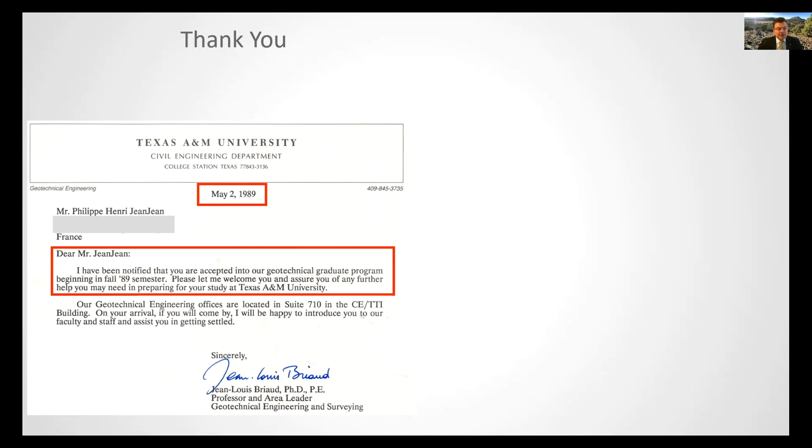I would be remiss, of course, if I didn't say thank you to Dr. Briaud. This is the letter I received in France back in 1989 from Dr. Briaud, welcoming me to Texas A&M University and assuring me of any further help that I may need in preparing for my studies at Texas A&M University.

And this is the note I found on my desk in 1992 from Dr. Briaud again: Dear Philippe, Amoco has an opening in the Research Geotech Division. If you wish to apply, send a letter with your bio data. Looks like a great job. It was a good job. It was a great job. I applied and I got the job, and Amoco merged with BP in 1999, and this is still the job I have today. So thank you, Dr. Briaud, for welcoming me to Texas A&M and helping me find a job all those years ago.

Now, let's talk about the world energy transition. I think it's a tremendously exciting time to be in the energy business. I'd like to show you this graph here.

This shows the share of world energy by fuel type. Oil reached 1% market share in 1877, and it took more than 40 years for oil to reach 10% market share. Gas reached 1% market share in 1899, and 50 years later gas still had not reached 10% market share. Nuclear energy never quite got to a 10% market share. Renewable energy reached 1% market share in 2006.

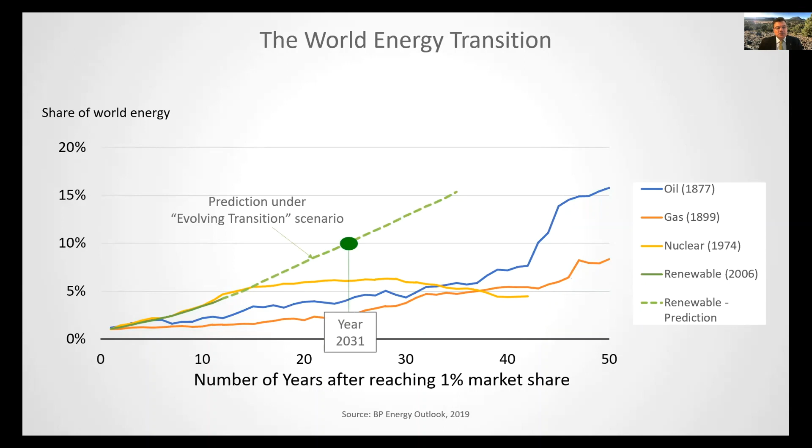What's fascinating is the predictions as to the growth of renewable energy. It is predicted to reach 10% market share in 2031, just 25 years after reaching 1% market share. So the conclusion is that renewables, which include wind, solar, geothermal, biomass, and biofuels, are set to penetrate the global energy system more quickly than any fuel in history. I found that fact absolutely fascinating.

The portion of renewable energy of interest to us today is offshore wind energy. We'll first look at the structures used to develop both oil and gas projects and offshore wind projects. The simplest structures are the monopod and multipod structures. In oil and gas, this is a monopile, which we call a freestanding caisson, and this is a multipod structure. They represent only a few percent of all platforms, and we use them in water depths that are very shallow, say less than 50 meters.

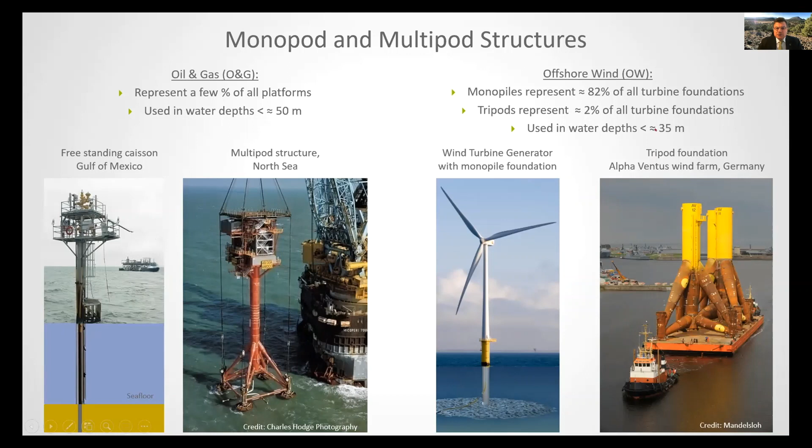In the offshore wind energy sector, monopiles are extensively used. They represent about 82% of all turbine foundations because they are very easy to fabricate, and the industry has become very efficient at procuring and installing them. Tripods are also used a little bit, but those structures are used in very shallow water depth, less than 35 meters. When the water gets a little deeper, we use jacket structures.

In the oil and gas sector, jackets are just steel tubular structures, as you see here. They represent 95% of all platforms. They are used in water depths up to 411 meters, and most of the time they are founded on the seafloor with open-ended steel tubular piles.

In the offshore wind sector, jackets are also used. They represent about 10% of all platforms, and so far they've been used in water depths up to 60 meters, mostly founded on driven piles. So these are the main types of structure.

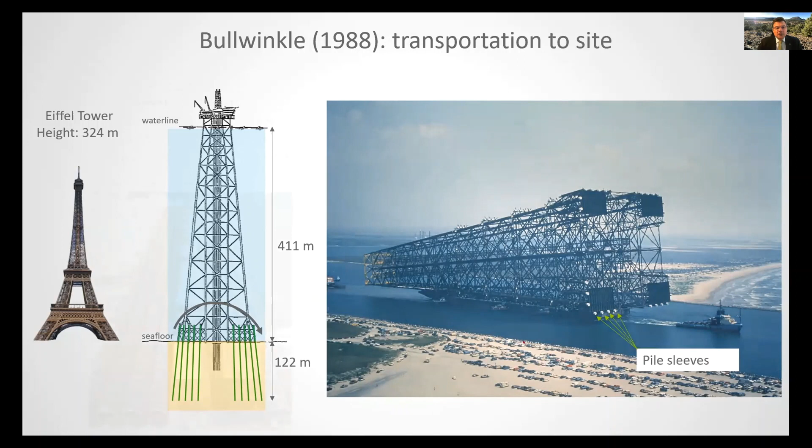What's fascinating is that things can get very big in the offshore industry. You can see the world record jacket, the Bullwinkle jacket, 411 meters in height, being towed to the site here. You can see the cars in the parking lot to give a scale of truly how gigantic the structure is. Those big structures can be anchored with big piles.

Here are typical dimensions. In the oil and gas business, we have diameters up to 2.5 meters, lengths up to 140 meters. So the L over D ratio, the aspect ratio, is typically greater than 30. Those piles can be long and are called long and flexible. You can see an example here on the barge—this is about a 140 meter long pile, about 1.5 football fields, and for scale you can see the people standing on the barge. The capacities are also very large, up to 100 meganewtons.

In the offshore wind industry, the diameters are much bigger because we need the monopiles to be stiff and to have the right natural period, and the best way to do that is to have a very large diameter. The vertical loads are not very high, so the embedment length is less, up to 40 meters. So the aspect ratio, the L over D, is between 2 and 6, and those piles are short and rigid. We'll explore in a little while the difference between long and flexible piles and short and rigid piles.

One of the consequences of these large sizes is that we cannot perform full-size pile load tests. We cannot find sites and machines that can apply those loads onshore. So this is not an option for the offshore industry.

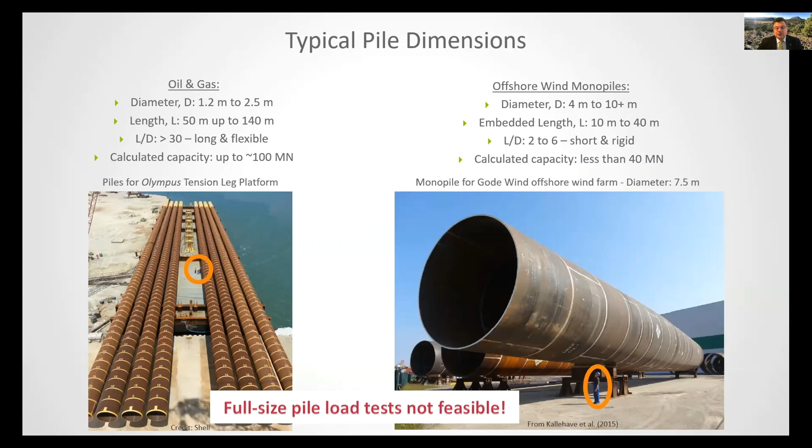The first topic I'd like to talk about today is the design of axially loaded piles in silica sand. Most offshore piles have been designed with the American Petroleum Institute, the API method, used since 1969. Very simply, the method says that the unit friction along the pile is given by the coefficient of lateral pressure times the vertical effective stress times the tangent of the interface friction angle, and that has to be less than a limiting value.

Similarly, the unit end bearing Q is given by a bearing capacity factor times the vertical effective stress at the tip of the pile, and that has to be less than the limiting value. All those parameters that you need are given in the codes and standards as a function of sand relative density. Very simple equations.

So a lot of authors over the years have investigated how well the method is doing. To do that, you take a database, and you can see various databases here used by various investigators. The graph shows on the y-axis the ratio of measured capacity over calculated capacity with the API method. If the ratio is less than 1, the capacity is overestimated. If it's greater than 1, the capacity is underestimated. This ratio is given as a function of the sand relative density, for piles in tension and for piles in compression.

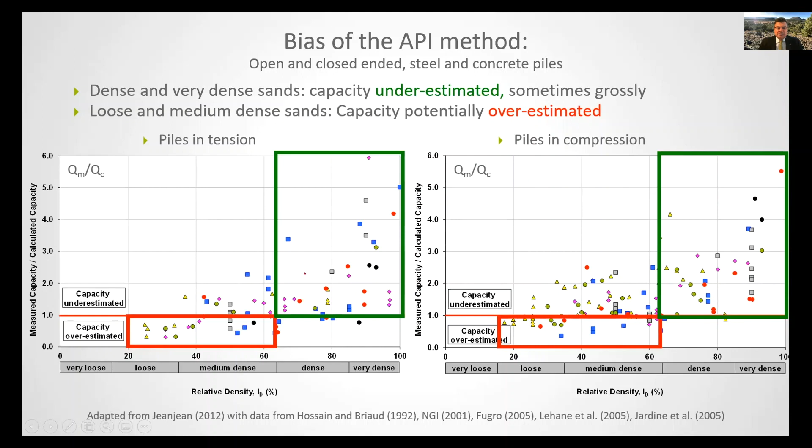So what do you see when you look at those graphs? Well, you see that for dense and very dense sand, the capacity is underestimated, sometimes grossly. For this particular data point here, the capacity is underestimated by a factor of 5. What you also see is that for loose and medium dense sands, the capacity is potentially overestimated. But generally speaking, you look at this graph and you tell yourself, it's not looking particularly impressive in terms of ability to predict capacity.

So here are a few thoughts on the API method. Why have we been using it for so long? Well, it does provide a reliable, sometimes overly conservative, capacity estimate for open-ended tubular steel piles loaded in compression in medium dense to very dense sand. And that's the typical offshore design case. So typically offshore, we are in this little box here for dense, very dense, and medium dense sands.

However, the method does not capture the physics of how friction and end bearing develop. It's very difficult to justify why the friction and the end bearing are proportional to the effective stress, which varies linearly with depth almost. It's difficult also to defend the existence of a limiting value both for the friction and the end bearing. Therefore, because the method does not capture the physics, it is difficult to extrapolate the method outside the database of pile load tests to design very large diameter piles.

The industry also decided in the 90s that it needed increased efficiencies. In other words, the conservatism in the method was too high, and we needed a more efficient method. Which brings me to CPT design method.

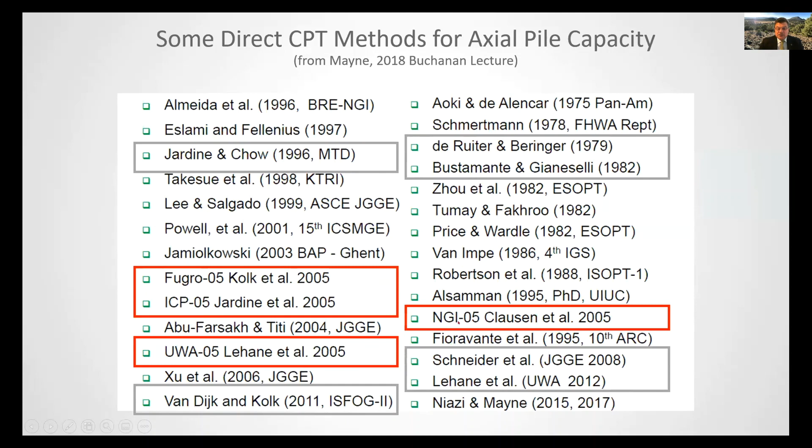Those 4 methods were developed between 1995 and 2005, but the key point is that each method was developed from a different database. In 2005, there really was no consensus in the industry as to which method was the best. And there was a bit of a hiatus between 2005 and 2014 where basically the industry agreed to disagree on which method to use.

Then there was a joint industry project, a JIP, initiated in 2014 to develop a unified, non-associated CPT-based design method for piles in sand. Non-associated, meaning that the method does not have the name of a contractor or a particular university. It's just known as the unified CPT method.

So the first step was to develop a unified database of pile load tests. Many people thought that could never be done, that the industry could never agree on a set of unified database. But that took 3 years. At the end of 3 years, we ended up with 71 tests on open-ended and closed-ended piles, from which we could develop the unified method.

So just to give you an example, these are the compression tests on open-ended steel tubular piles that have been used over time. You can see the tests that were used to develop the ICP method, the tests used to develop the NGI method, the tests used to develop the Fugro method, and the tests used to develop the UWA method.

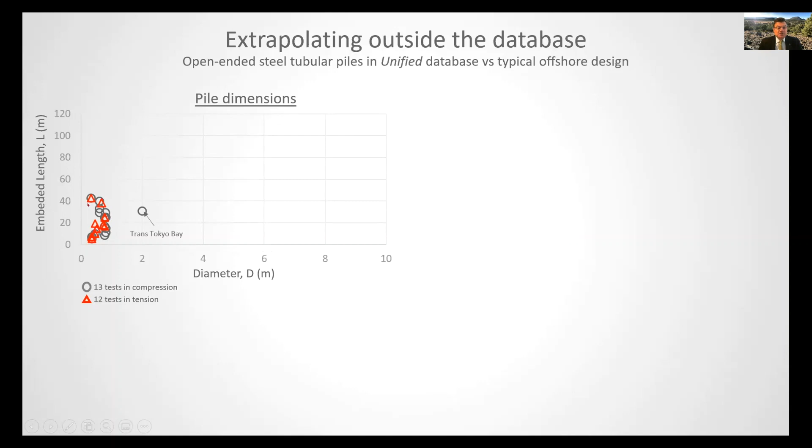Now those dimensions have nothing to do with typical dimensions for an offshore wind monopile, an oil and gas jacket pile, or an offshore wind jacket pile, except for one test. There's only one test, the Trans-Tokyo Bay test, that has reasonable dimensions.

Now when you look at the capacity in the database, whether in compression or in tension, you can see that most of the tests in the database have a measured capacity of less than 5 meganewtons. Whereas in practice, we typically have to design those piles for ultimate capacities between 30 and 100 meganewtons. And again, there is only the Trans-Tokyo Bay test that fits a reasonable real case.

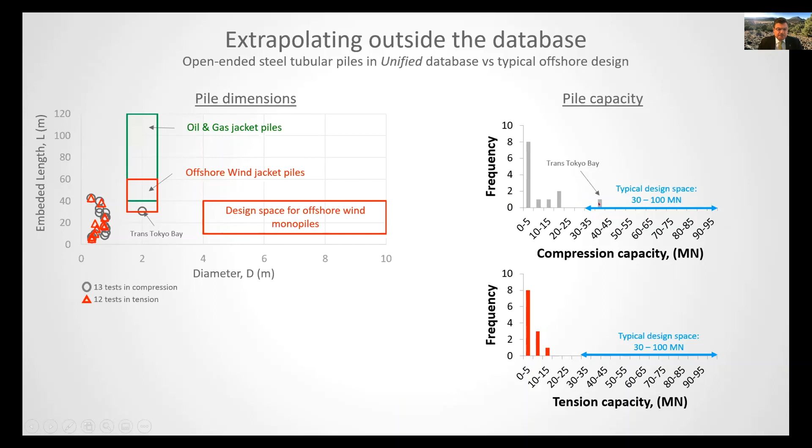So those are the key challenges. After decades of testing piles in sands, we only have one test that resembles an offshore design condition. Therefore, the unified method needs to capture the physical processes that control friction and end bearing, and needs to understand how those processes extrapolate from the database to the pile design condition.

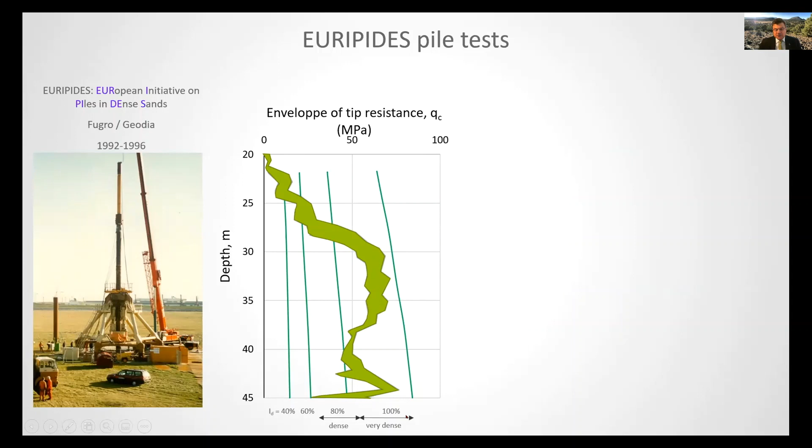So to give you an example of the improvement with those CPT methods, let's look at some results from the EURIPIDES pile load test, which were performed in the 90s. So you can see within the depth of interest, the tip resistance envelope, we are dealing with dense and very dense sands. And here is an example of test results.

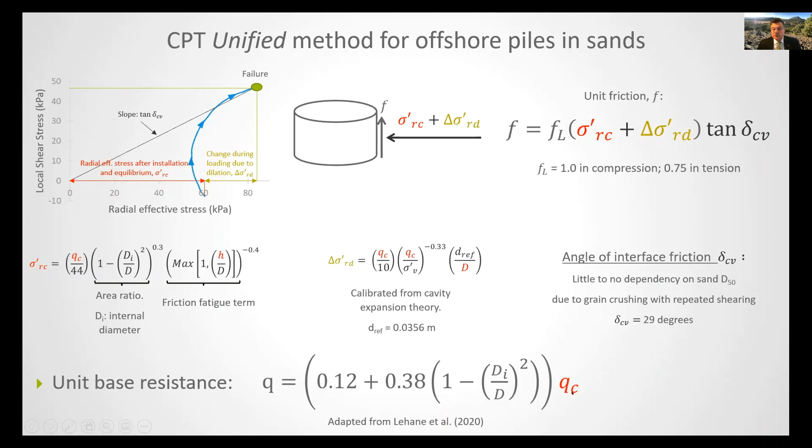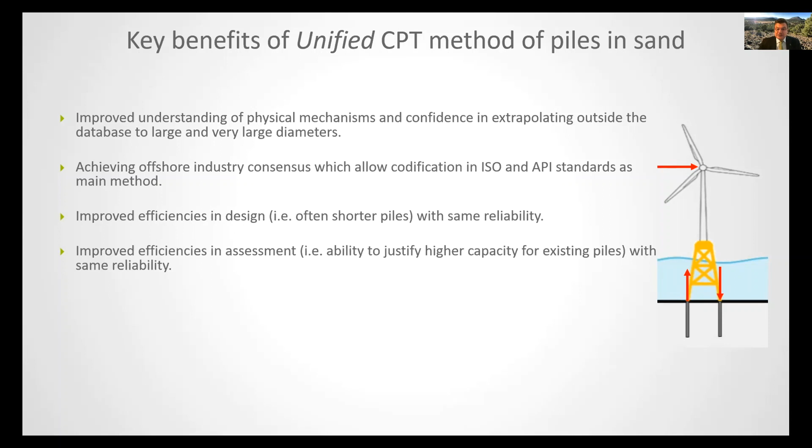We've improved efficiencies in design. That is, for a given load, we have a shorter pile with the same reliability. We've improved efficiencies in assessment. That is, for an existing pile, we're able to justify a higher capacity with the same reliability. We've removed some of the unconservatism of the API method for piles in loose and medium dense sands. And finally, this method is equally applicable whether it's an oil and gas or an offshore wind structure.

This is an example here of an oil and gas, of an offshore wind jacket. So what's fascinating is if you look at the timeline of the development and codification of the offshore CPT method, between the time we did those key instrumented pile load tests in the 90s to the time we will publish a codified method in 2022, it is a 30-year journey.

You see, it's easy, or it's one thing to say the API method does not work very well and needs to be replaced, but it's quite another to agree on what the replacement method should be. So it's a landmark achievement for us in the offshore industry, which is why I'm really excited to share it with you today.

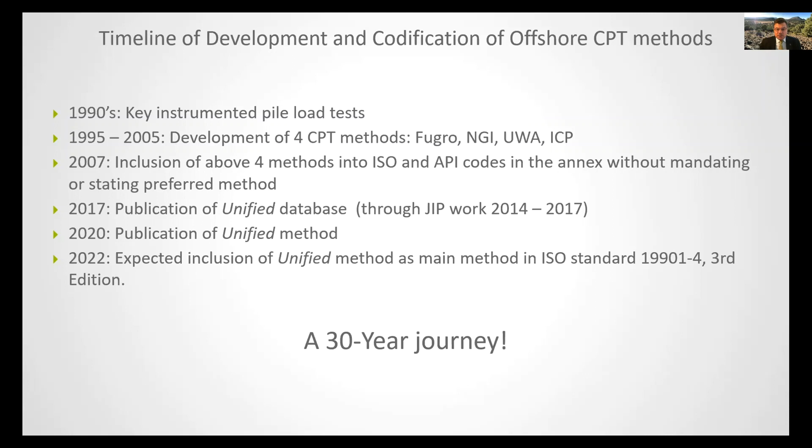Let's switch topics now. The second topic I'd like to address is laterally loaded pile design in clay. Most piles offshore have been designed using beam column analysis and PY curves. In beam column analysis, the pile, which is loaded laterally, is modeled as a beam, and the soil is modeled as a series of nonlinear springs called PY springs, which describe the development of the lateral soil reaction, P, as a function of the lateral pile displacement, Y.

These methods are applicable and appropriate for the analysis of long, flexible piles. The soil is assumed to move only laterally, so to model it, I need to use only lateral springs. The pile tip does not move, so I do not need to model it.

The PY curves in current API and ISO codes were based on limited tests performed in the late 50s and early 60s, published by Professor Matlock in 1970 and included in API practice in 1972. They work well for us, but they've also been widely documented to underpredict both the soil stiffness and soil strength. So why have we been using them for 50 years? Well, that's because they typically overpredict the maximum bending moment in the pile, so most of the time they put us into a safe design condition, although the conservatism can be excessive.

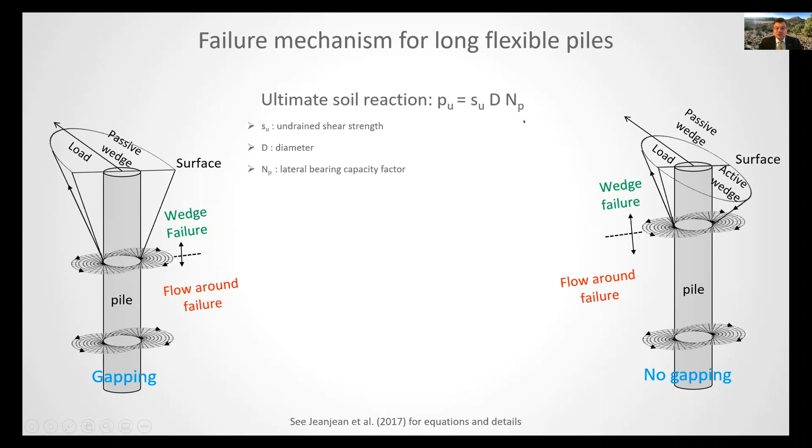So how do we calculate the ultimate soil reaction, PU? Very simple: it's the soil shear strength times the diameter times a bearing capacity factor. So the name of the game is to try to calculate this bearing capacity factor.

The new method for the wedge failure results from finite elements and upper bound limit analysis, and for the flow-around mechanism, it uses results from upper bound limit analysis. The bottom line is the bearing capacity factor you will calculate with the new method is higher than the bearing capacity factor from the existing curve and method developed by Professor Matlock.

So how do we get the shape of the PY curve? We use what's called a direct simple shear test in the laboratory. We perform this test on a clay sample and measure a normalized stress-strain curve. We use this stress-strain curve to define hardening properties in the plasticity soil models. We then run finite element analysis where we push the pile laterally and measure the resistance of the soil.

From this, we obtain numerically a normalized PY curve, the development of P as a function of lateral displacement. What we've developed is a scaling method for which each point on the normalized DSS curve is transformed into an equivalent point on the normalized PY curve. That's how you get the shape of the PY curve.

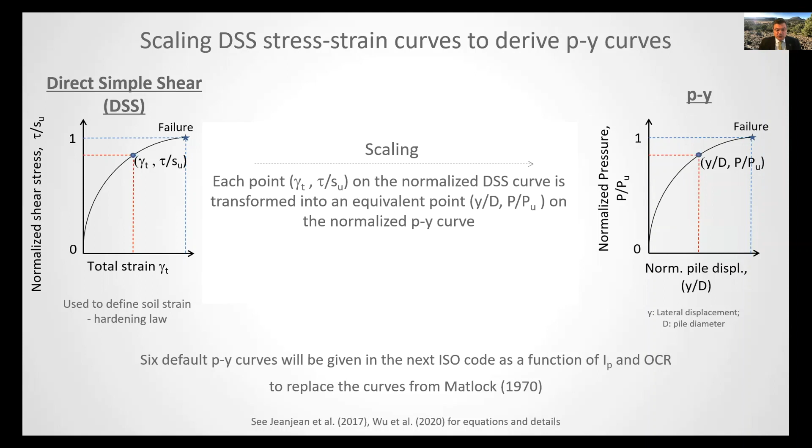Now, in the new ISO code, you will have six default PY curves given as a function of soil plasticity and overconsolidation ratio, and those will replace the curves of Professor Matlock.

So there is no question that the loads the platforms are experiencing are cyclic in nature. So what do we do to understand those? Well, it brings us to understanding the behavior of clay under cyclic loads, and again we use the DSS test to do that.

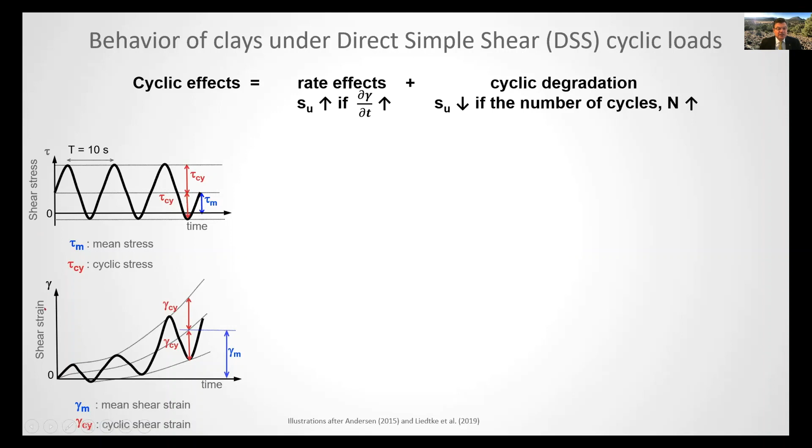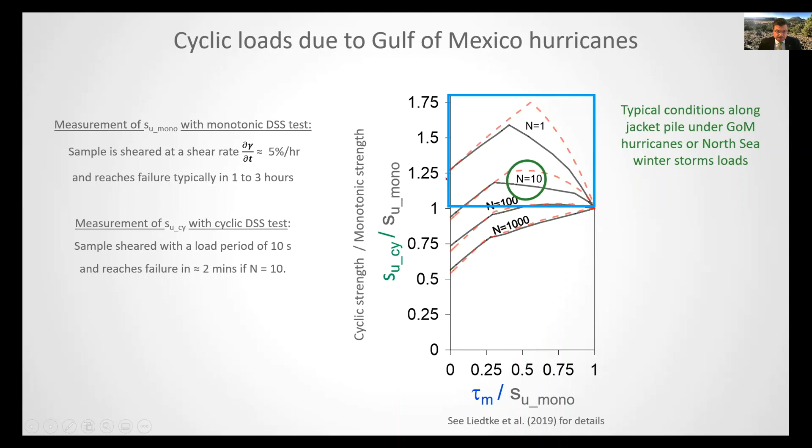Now, this is where we are for a full-size jacket. And this is where Professor Matlock was when he ran his tests in the late 50s, early 60s. He performed cyclic tests, but with hundreds of cycles. We know now that those hundreds of cycles are not representative of what is experienced by a platform offshore. But for hundreds of cycles, this diagram tells you that the cyclic strength is less than the monotonic strength.

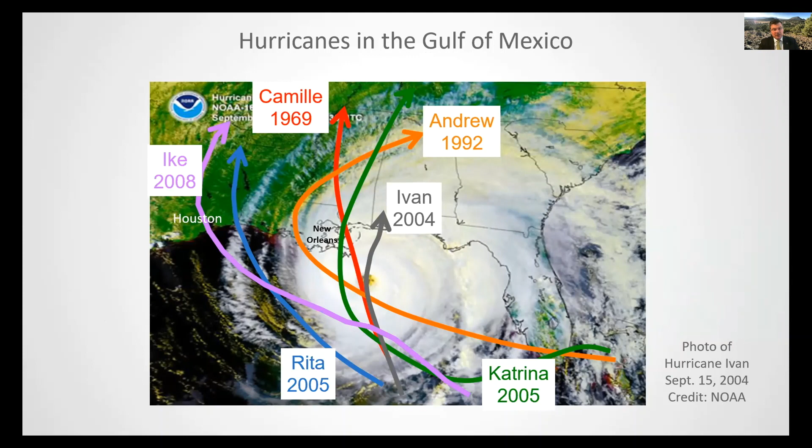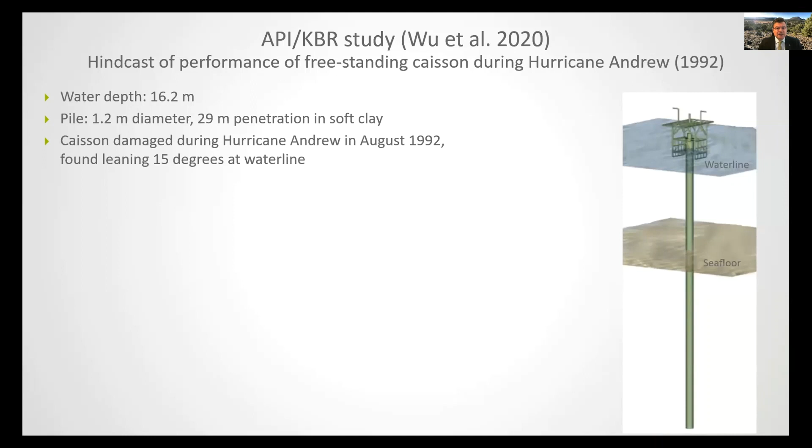It was found leaning 15 degrees at the waterline. This is not the actual caisson, but one similar to it. This is what you would find when you go offshore after the hurricane.

So what we did are what we call dynamic pushover analysis using two sets of PY springs, the current monotonic PY curve and the future cyclic curve. You can see here the waves hitting the platform.

Using the current monotonic PY curve, you can see that the pile is starting to plastically hinge. The pile above it is starting to yield, but close to the seafloor you see no yielding in the pile because the soil's resistance is too small. The PY spring is too soft.

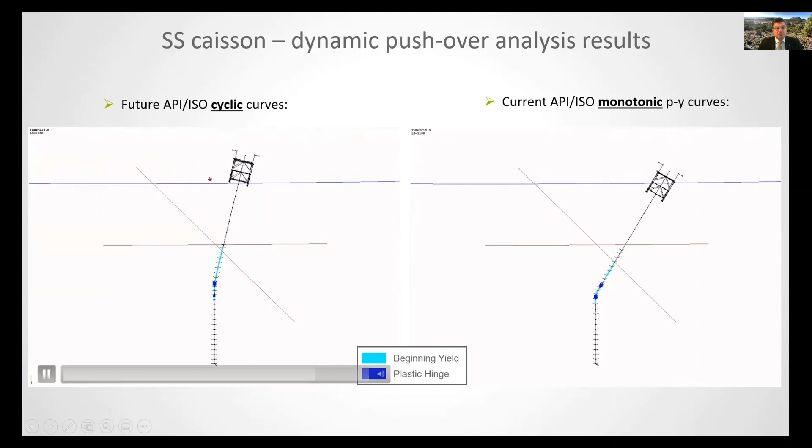With the new curves, you can see that the plastic hinge is also forming a little higher, but now the pile is yielding all the way to the seafloor because the PY springs are stronger. And you can see that the caisson is starting to lean more and more with the old curves than it is with the new curves.

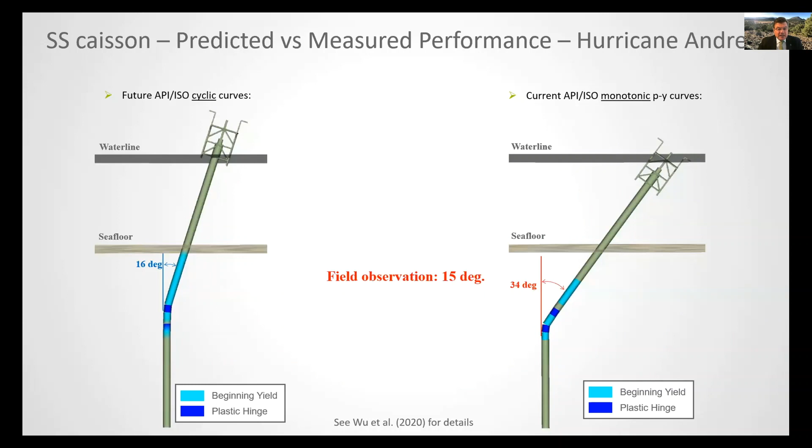So at the end of the analysis, using the current curves, we would predict that caisson to be leaning 34 degrees after the hurricane. With the new curves, the cyclic curves predict it will be leaning 16 degrees. And I've told you already that the field observation was 15 degrees. This is really exciting. For the first time, we are able to hindcast or reproduce the observed damage that we see after hurricanes.

Another example is this jacket, which was damaged by Hurricane Gustav and Ike, but mainly Hurricane Ike in 2008. So what kind of damage was observed on this platform?

Close to the waterline, you had joint failures and separated members. You had cracks at some of the connections. Some of the braces or members were buckled. You can see that this member here is no longer horizontal, it is bowed because it has buckled in compression.

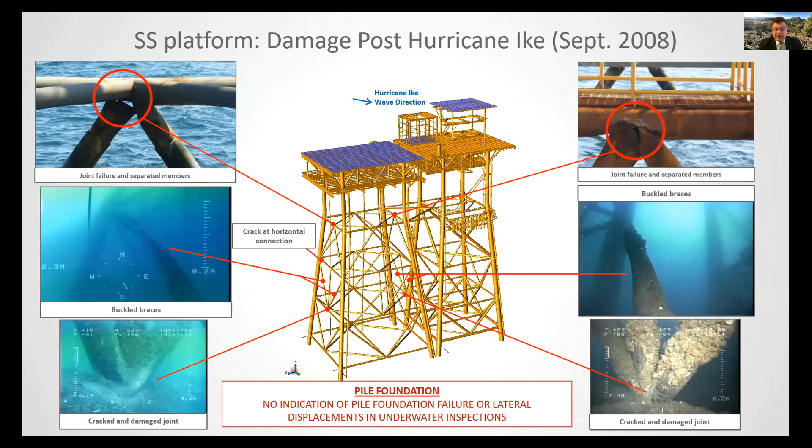Closer to the seafloor, we see cracked and damaged joints right there. And very importantly, we see no indication of pile foundation failure or lateral displacement at the seafloor. We didn't see that in any of the underwater inspection.

So how well did we do predicting the damage with the new springs? We have little damage in the pile, just a little bit of yielding, and that's consistent with the observation. And this buckled member here that was predicted only with the future cyclic PY springs, well, that's this member here. It actually did buckle. So again, we are able to much more accurately reproduce the damage and behavior that we see with those new PY springs.

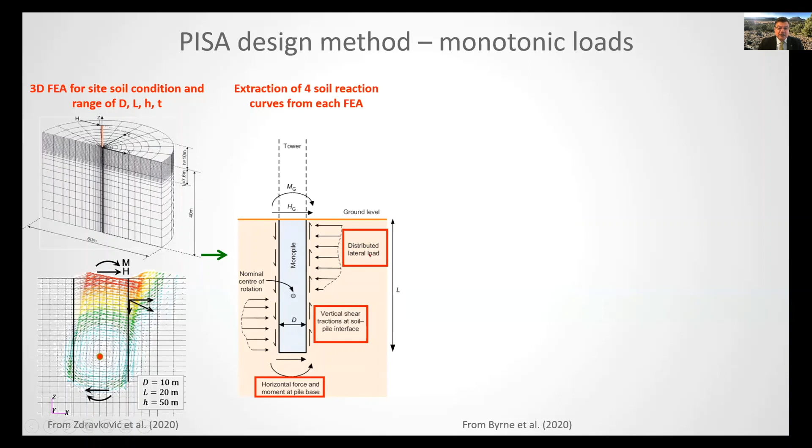If you do that, you will see that the soil along the pile wall not only moves horizontally but also vertically, because the caisson is short and rigid. You will also see that the base moves horizontally and also rotates. So to capture all those soil displacements, from each finite element analysis you extract 4 types of soil reaction curve: one distributed lateral load reaction curve, one vertical reaction curve, and 2 reaction curves, the horizontal force and the moment at the pile base, to capture the behavior of the pile tip.

At the end of the day, you generate a beam column model that has 4 reaction curves. The idea is that in a practical design, instead of having to do thousands of 3D finite element models, now you can do thousands of beam column analyses, which are much more computationally efficient. But now you not only have 1 soil reaction curve, the PY curve, you have 4 reaction curves. However, this distributed lateral load reaction curve serves the exact same purpose as the PY curve we used in the oil and gas industry. It models the lateral soil behavior.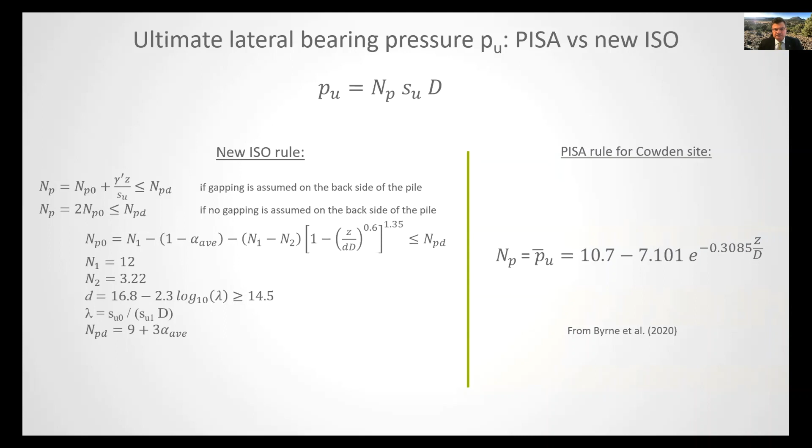Well, if you take the tests at the Cowden site, those 2 tests here, and use the ISO method, you can calculate a lateral bearing capacity, NP, as a function of the normalized depth Z. You have this for those two piles. And this is the empirical relation I just showed you that was published for Cowden, which applies to all pile diameters and lengths. So you can actually see that although they look completely different, they give you very similar results.

The PISA project also did finite element analysis for what they call calibration piles. These are bearing capacity factors extracted from finite element analysis. At some depth, those values are very small, but these are the values around the rotation point of the short and rigid monopiles, so the lateral bearing has not been fully developed. Those data points are neglected.

So again, you can use the ISO method for the FEA soil condition, and you calculate those two profiles for those two calibration piles. You get very good agreement in terms of calculating the ultimate bearing capacity between the PISA framework and the new ISO framework.

In terms of the shape of the PY curves, in the ISO document, these are the three default shapes of the curve presented for plasticity indices greater than 30%: the curve for OCR less than 2, OCR of 4, and OCR 10. And these are the three curves for plasticity indices less than 30%, applicable to the Cowden site, which has a plasticity index of about 20%.

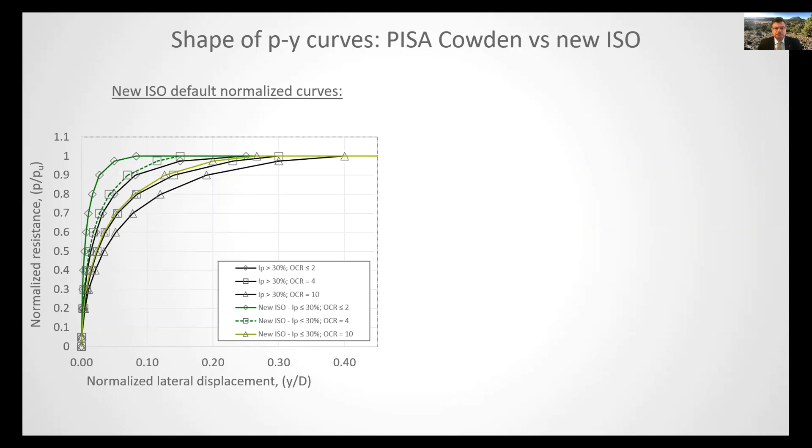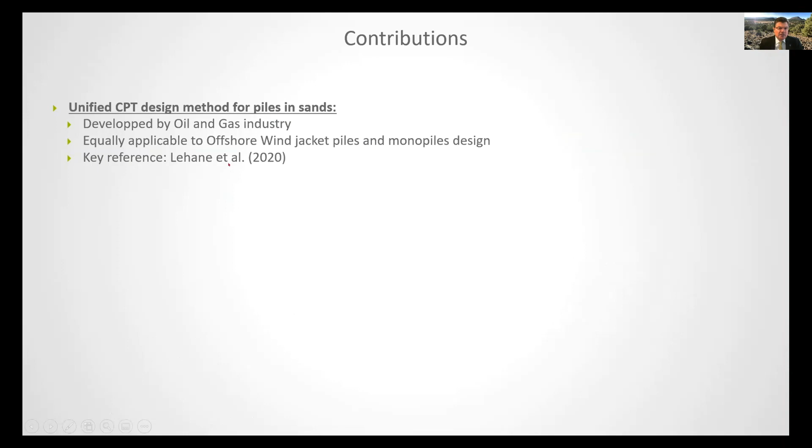I've told you about the new ISO PY curves for long flexible piles in clays, again developed by the oil and gas industry, but also applicable for offshore wind jacket piles, though not for monopiles which have an L over D of less than 10. For those design conditions, you need more soil reaction curves, going from one reaction curve, the PY curve, to four reaction curves, for example, as per the PISA method. Other designers use only three curves, so there's no industry agreement on how many curves are really needed. Again, read the paper if you can wait until May of next year.

This is an offshore technology conference paper that will have all those details. I've also told you about the PISA design method for clays, developed completely independently by the offshore wind industry. It's very satisfactory to see that the distributed lateral load reaction curves for the Cowden site are entirely consistent with the recommendation of the new ISO PY curves. We could use the PISA design method in the oil and gas industry if we have a foundation that has a similar geometry and aspect ratio. And again, this is one reference, a Geotechnique paper that I would encourage you to read if you're interested.

These are all the references I've quoted in the paper, in the lecture. Don't bother writing them down now. You can listen, view the recording of the lecture, and write them down at your leisure later on.

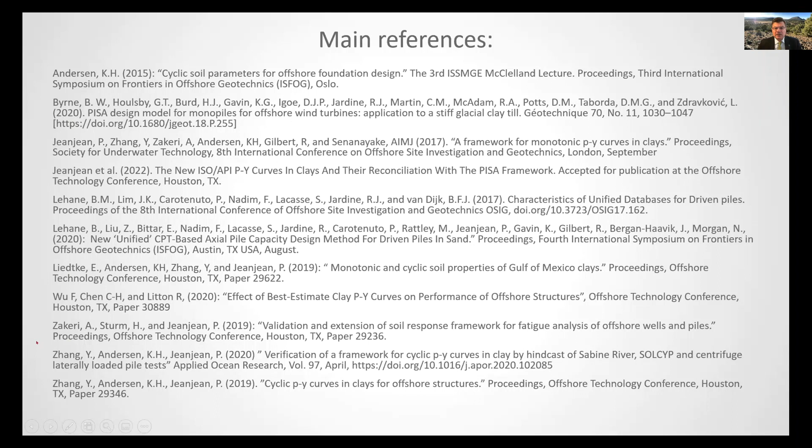So if any of what I said is of interest to you, then I would recommend you check out this website, isfog2020.org. ISFOG stands for International Symposium on Frontiers in Offshore Geotechnics. The conference was supposed to take place face-to-face in August of 2020 in Austin. Obviously, that did not happen because of COVID, but we did publish the proceedings that you can purchase, where you will see 200 plus technical papers, 6 keynotes, and the 4th ISSMGE McClelland Lecture. We really hope to be able to have an in-person conference in Austin next year, in late August.

And to try to advertise the conference, we will be offering 6 webinars in 2022, free of charge, streamed live and uploaded to YouTube. So you can see we'll be offering 1 a month on a variety of topics. You can see the organizers and the presenters here. We'll talk about data science, cyclic loading, the new PY curves for piles in clays, the new CPT-based design method for piles in sands, and then we'll talk about 2 joint industry projects from the offshore wind industry, the Redwind JIP and the PISA JIP.

So all of this is organized by ASCE and the Geo-Institute. So again, check this website. You can get the information to all this, the webinar and how to register for the conference.

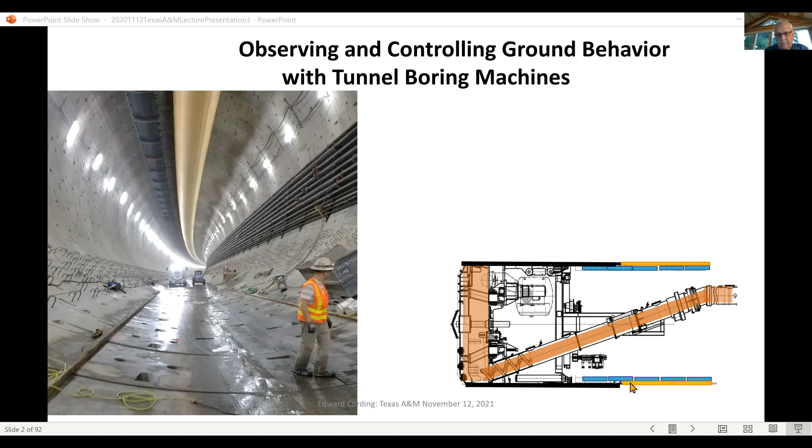And it has continued with the pressurization around the entire shield, where we have what is essentially a fully pressurized envelope. We are pressurizing not just the face, but the perimeter of the shield and the gap that is being grouted in the tail, grouting that under pressure. A fully pressurized envelope, and that is what is helping us essentially eliminate ground loss and reduce settlements that could damage structures.

I'm going to talk a little bit about the largest tunnel boring machine that was ever advanced under an urban area, the 17.5 meter Alaskan Way project in Seattle, completed in 2017. And I wanted to just step back and take one brief look at where we started.

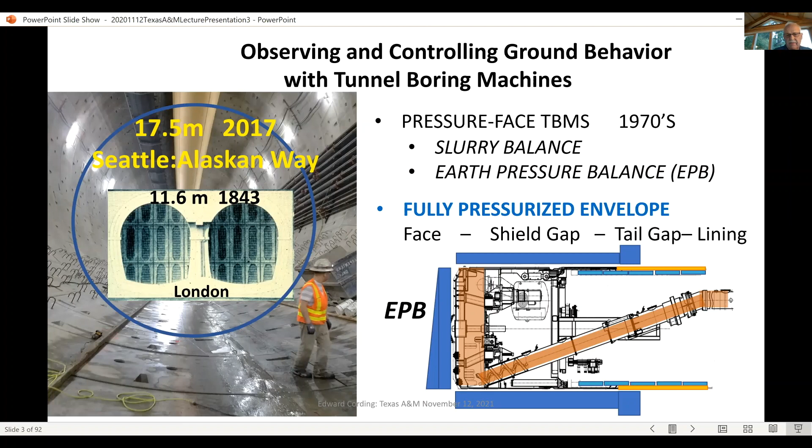In London, an 11.6 meter, about 40 foot wide tunnel was built under the Thames River in 1843. It was largely completed, and it was built by Marc Isambard Brunel, who designed and constructed it, acted as the engineer and the contractor for the project. He basically had a patent application for a tunnel shield, and the application was to open the ground in such a manner that no more earth shall be displaced than is to be filled by the shell or the body of the tunnel.

And he was not able to achieve that objective. There were 7 eruptions or inflows from the river, the Thames River, into the tunnel during construction. And he continued and completed that in 1843.

At that time, he basically received from Queen Victoria an honorarium, essentially what became - he was essentially knighted by Queen Victoria in 1841. I would think that they weren't quite done, but I would think that would, in our terminology, would at least be considered substantial completion.

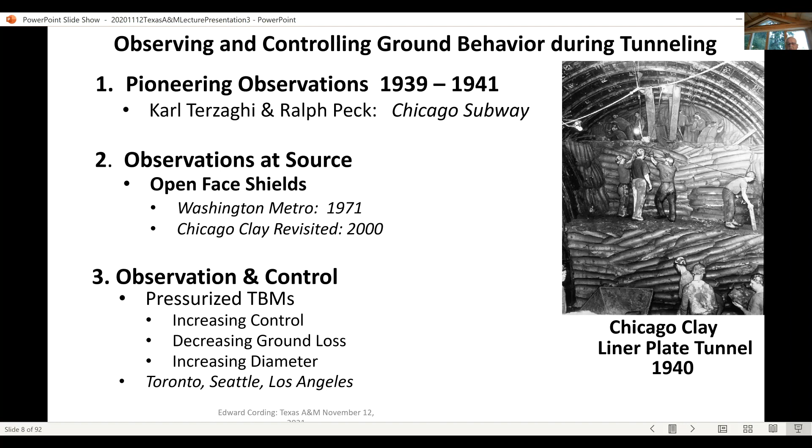But we have still struggled over the last 200 years to meet that objective. I want to talk about how we are doing that and how we are observing and controlling that ground behavior during tunneling, starting with pioneering observations that were done on the Chicago subway by Karl Terzaghi and Ralph Peck. Then the observations with open face shields, and we'll talk a bit about Washington Metro and Chicago clay tunnels, and then finally going to the observation and control that is achieved with the pressurized tunnel boring machines.

Starting with Karl Terzaghi and Ralph Peck's work on the Chicago subway, it had not been done. Correlations between what was happening in the tunnel and at the surface really hadn't been handled much or evaluated at that time. Terzaghi wanted to relate the tunnel construction to surface settlement.

So they conducted squeeze tests to measure the displacement of the clay into the tunnel, which allowed them to determine the volume of ground loss. They correlated this with construction methods and observed that the support of the arch, the excavation procedure, was not working. They reduced the settlement by correcting that, from 4 to 2 inches.

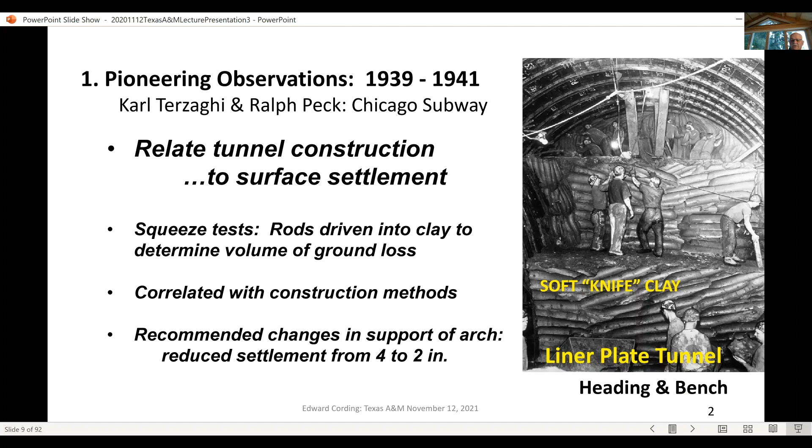Later, something not in the articles Terzaghi had produced back in 1942, Peck was asked to evaluate why the settlements had increased from 2 to 5 inches again as they went deeper. He went into the tunnel and essentially did the squeeze test, but focused his time on what was happening during construction. The delay in filling this 5-inch gap between the liner plate and the soil was causing inward displacement, and the only support essentially was the air pressure, not the lining. The lining itself was free and not tied to the clay at that point. He reported on this and evaluated the displacements, and the correction reduced the settlements again from 5 inches back down to 2 inches.

It was really interesting to see the way they approached the project. They focused on looking at the construction, correlating that with the ground loss around the tunnel, looking at soil properties, particularly unconfined compressive strength and water content of the Chicago clay. Then they correlated all of that with the settlement at the surface and produced it on a single blueprint.

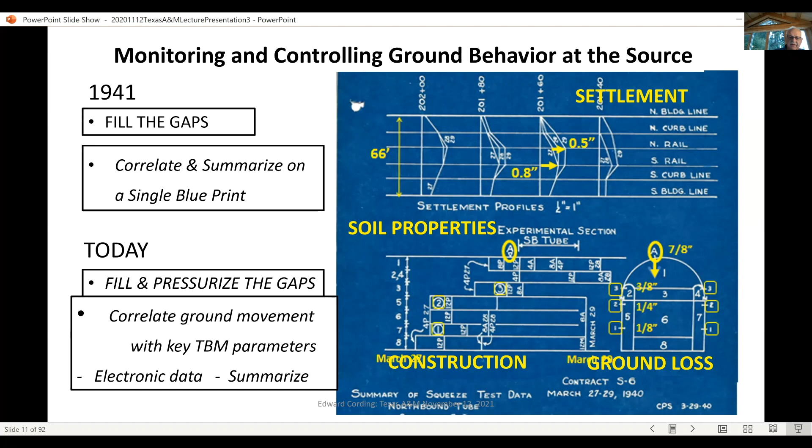And we need to be correlating the ground movements with key tunnel boring machine parameters. We're working now with electronic data and several thousand tags on the tunnel boring machine, reading continuously various functions, so we have to sort that out and summarize it. That's a real problem in our industry in underground construction, putting this together with the ground movements and what's happening out on the tunnel boring machine. It's a real important part of assessing and correcting and controlling the tunnel boring machine.

The second item I wanted to cover was the observations with open face shields. Over the years, trying to control ground loss was a continuing challenge. We had a situation where the face of the tunnel was not fully supported, and there are various methods used, but you have the risk of large local ground losses into the front of the tunnel boring machine. You also had a problem with the regular ground loss. It's very hard to get ground losses down below about 2 inches because of the loss into the gaps around the machine. So we'll look at two cases.

It was really a struggle and a continuing challenge. I saw that from the 1970s into the 2000s, the difficulties we had with the open face tunnel boring machines.

So we go to 1972 on the Washington Metro, and we had an objective of looking at the 3D movements around the tunnel using borehole extensometers and inclinometers. I think that was the first time it was all put together in a way where you could look at the total three-dimensional pattern of the ground movements as the tunnel boring machine advanced through the ground.

In this case, it was right in the middle of Lafayette Square in front of the White House, and we made those measurements sitting out there in Lafayette Square, watching protesters and supporters of the White House and its occupants jousting and moving around on the adjacent Pennsylvania Avenue.

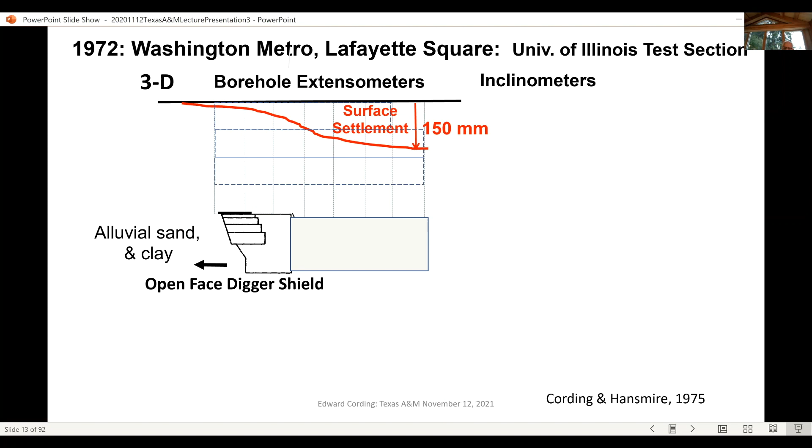So we had an inclinometer right in front of the tunnel, and we drove right into it, removing the torpedo before the casing was hit by the tunnel boring machine. We were able to measure that displacement, and it was only 6 millimeters. This confirmed that the loss was not in the front of the machine causing ground loss.

Something was happening around the tunnel boring machine. The deep anchor above the tunnel, measured with the extensometer, showed really large settlement of 330 millimeters. What was happening was that tunnel boring machine was really a shield, not a real boring machine. It was an open face shield plowing through the ground because of the balance of the shield itself, causing settlement almost every time it went forward 4 feet. There would be settlement of a couple of inches occurring as it went by.

The pitch was much higher than the grade. They corrected that on the second drive and reduced the settlements down to about 50 millimeters, or 2 inches, with that effort. Then I go on to another case where we're in the soft Chicago clay with a smaller diameter tunnel, with a cutter head or wheel at the front.

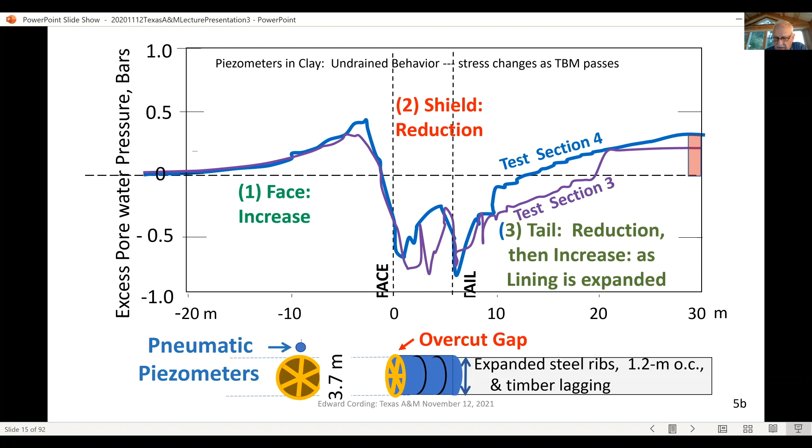When you got through the advance of the tunnel boring machine by that location, if the pore water pressures were greater than the reference pressure, then the pore pressures would drop and drain, and you would get more consolidation. In this case, we had a situation where an additional inch of settlement occurred due to the consolidation. So the piezometers in the soft clay are measuring those undrained stress changes.

We're going to also look at the case where the piezometers in sand are measuring the flow of materials from the face and shield, causing dynamic increases in pore water pressures around the tunnel boring machine.

You have to essentially maintain those pressures on the tunnel boring machine with an outward gradient sufficient to support the soil outside and to balance the water pressure.

So the lesson from looking at the history of the liner plate tunnels in Chicago and the later work is that you really have to support the face and fill the gaps. The face support in the Chicago tunnels was compressed air. The lining gap was minimized, and they filled it with pea gravel immediately to limit the movements. That was really a source of a lot of the settlement that did occur at the ground surface.

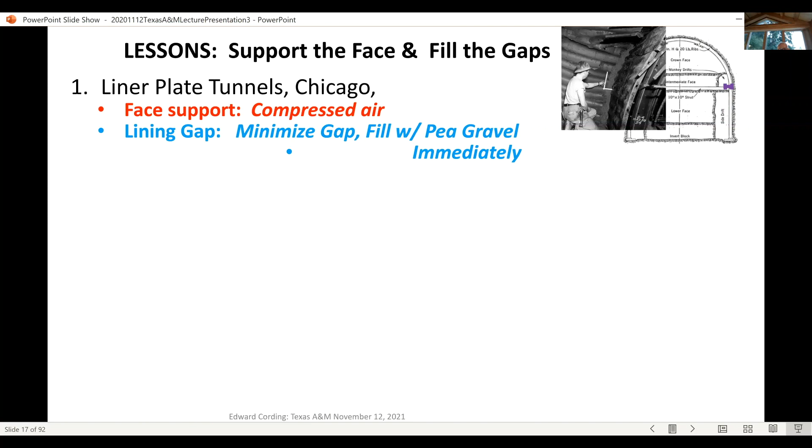The open face shields that we were talking about in the last 50 years really had the potential for large ground loss and flow into the face. That overcut gap was not filled, and it was inevitably the cause of ground loss and settlements at the surface that exceeded the levels that would be required to prevent damage.

So we look at the pressure face of fully pressurized tunnel boring machines. They go from pressurizing the face to prevent that inflow, and now we are pressurizing the gaps to prevent loss into the gaps and reduce the settlements. That's the revolution that has been happening, where we are now tunneling under major structures and urban areas with large diameter machines and small cover without damaging settlement.

So let's just look at the profile here, to see what is happening with the pressure face tunnel boring machine, the sort of thing that has been in use now for over 40 years.

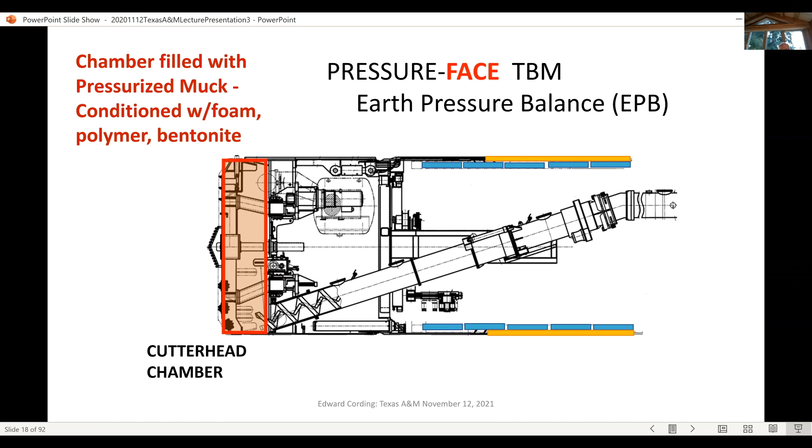The chamber in the front is filled with this pressurized muck. Essentially, the excavated material is conditioned with a foam - a water and soap mix, a surfactant that interacts with the soil to provide something that is perhaps a viscous fluid. Polymers and bentonite may be used to make and condition it into a viscous fluid that, when pressurized, supports the face.

The screw removes the muck and provides a back pressure. So you have then a pressure applied at the face to balance the groundwater pressures and the active earth pressures.

So you really need to monitor that pressure, and the key means of monitoring and controlling the tunnel boring machine are the face pressure gauges. On a 20-foot machine you'll have 2 at the top, 2 in the middle, and 2 at the bottom. You have to maintain those pressures above the groundwater pressures and any active pressure of material that could just flow in as an active force.

The other thing you do is check on the back end of the machine on the weight scales to determine the weight, calculate the volume of material, and compare that to the volume of your advance to make sure you're not excavating more material than should be excavated within the shield. Essentially, you're trying to meet Brunel's criteria to not take out anything more ground than around the perimeter of that shield.

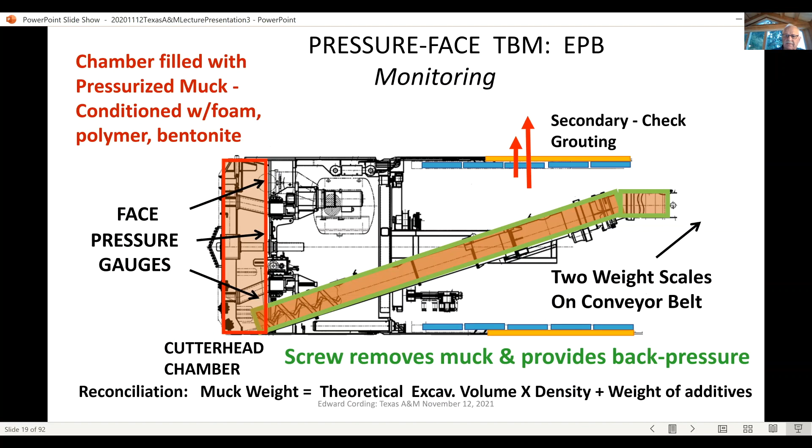As we go on from just looking at the pressure face, we need to start thinking about what's happening around the shield body. We have the segmental lining that's erected in the tail of the shield, and grout is injected under pressure through the back end of that tail, or the back end of the shield itself, to fill the gap as the TBM advances. It's coordinated with the TBM advance - the TBM does not move forward unless that gap is filled.

That gap is on the order of 4 or 5 inches and would cause extremely large settlement if not filled. The other gap is around the shield perimeter itself, right behind the cutter head, and the muck can flow into that gap and actually fill it, but it isn't always consistent - particularly with coarse materials, they're not going to be able to flow around the perimeter from the cutter head into that gap.

So what we have been requiring on our projects, and what was required and used throughout the large diameter tunnel construction in Seattle, was to pump a slurry of bentonite into the gap continuously as you advance the tunnel boring machine, and to maintain that pressure so that you would essentially support the ground above the shield with that pressure.

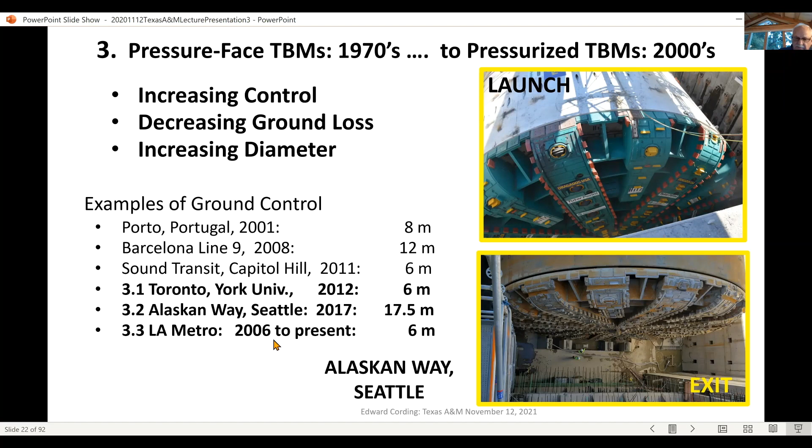In Toronto, they were basically driving with two earth pressure balance tunnel boring machines, 6 meters in diameter. They had to pass underneath the spread foundations of the Schulich building at York University. They were only 6 meters below, and there was a plan to put in compensation grouting with hundreds of horizontal pipes beneath the foundations along the TBM pass.

The effort there was to hold the settlements and the heave after the TBM had gone through, using the up and down compensation grouting, to end up with less than 10 millimeters of settlement above this very major building on the university campus.

The tunnel boring machines were advancing toward that area. They'd had some problems with the compensation grout subcontractor, who had issues and did not perform. The compensation grout pipes were not in place as the TBMs approached and were within about 150 meters of the building. The contractor was doing pretty well—ground movements were relatively small, and he was at greater depth than the 6 meters to the foundations.

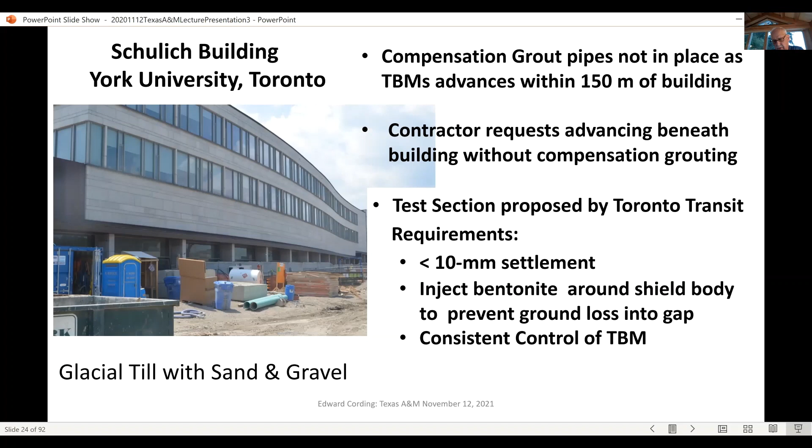We were very interested in having them inject bentonite into the shield perimeter to prevent ground loss into the gap. They had the equipment and capability of doing that, but hadn't been doing it, and that was something they then started to do. We were most concerned because we were getting into sands and gravels where it was more critical to fill the gap, since we didn't think the muck coming around the perimeter alone would fill it.

On the second drive, the contractor himself decided to increase the pressures. They were already relatively high, at an overburden pressure of about 2.5 bars, and he operated the machine at a shield pressure of about 2.1 bars. As a result, the settlements dropped to less than 2 millimeters. The 2 millimeter figure is an average—everything was slightly less than 2 millimeters, or around 1 millimeter.

So you really had a situation where the only thing happening is the elastic displacement around the shield due to the difference between overburden and shield pressure—like a thick-wall cylinder type equation. The settlement is proportional to the diameter of the tunnel boring machine times the difference in the pressures, divided by a modulus.

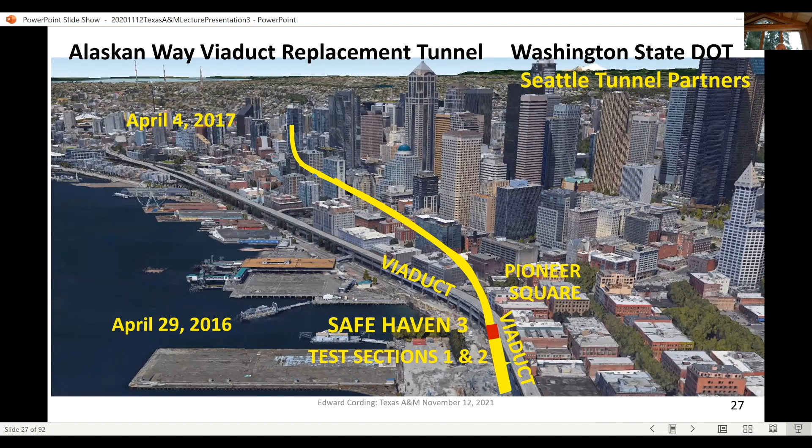On April 29th, 2016, they exited the Safe Haven 3 and began their advance under the viaduct, under Pioneer Square, buildings from the late 1800s and early 1900s, and then under a large number of buildings in downtown Seattle. The ground there, once you get below the tide flats and hydraulic fill and recent alluvium, is basically heavily over-consolidated lacustrine clays and silts, the tills, outwash sand and gravel.

The key item here is that the outwash sand and gravel extended over the entire length of the project. That meant at the bottom of the tunnel we were always in very permeable sands, and it had to balance the face to prevent inflow. If inflows occurred in that sand and gravel at the bottom of the tunnel boring machine, it could have caused voids that would move upward, but it would also cause softening and voids at the bottom, and the tunnel boring machine could go offline.

A 57.5-foot machine offline under downtown Seattle would be a tremendously difficult recovery, if not in some cases impossible. But the good news about that outwash sand and gravel is that because it was so permeable, the groundwater level throughout the entire tunnel was at about high tide level. That meant the pressures we had to balance for were relatively low even when we got down to cover depths of 60 meters.

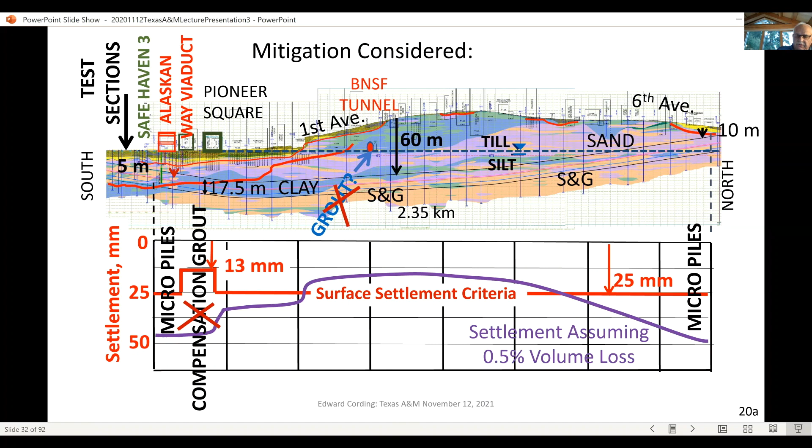Giving a preview of what actually happened: the actual surface settlements, at shallower depths usually less than about 100 feet or 30 meters, we really could not pick up. We might have had settlements on the order of 1 millimeter at the surface. In other places, you could pick up a bit from the automatic total station measurements on the buildings, sorting it out from normal tidal changes and other environmental effects that caused changes at least as large as the actual settlement we were trying to measure.

So the question is, why was that settlement so consistently small compared to these other estimates based on percentage volume losses from previous projects? Again, it goes back to the gaps - are we taking care of the gaps and preventing them from allowing flow into the gaps that would cause ground loss.

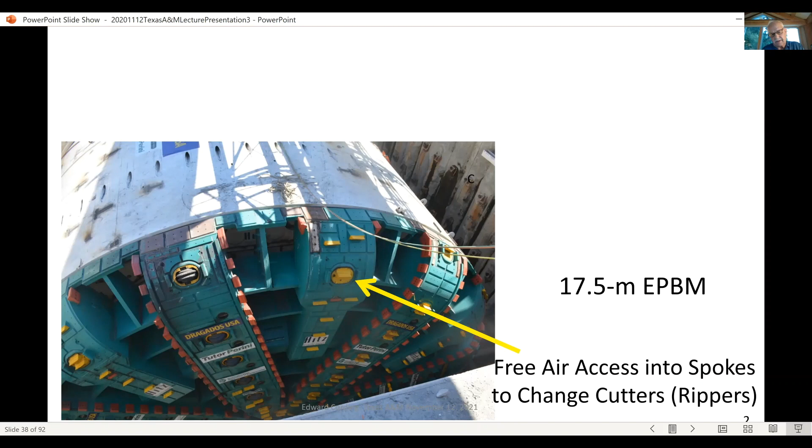The machine has free air access into the spokes. Because it's so large, workers can actually walk into the spokes to change the rippers right on the front of the tunnel boring machine - in some cases they have disc cutters. They ended up on this project taking out the disc cutters and staying with the rippers.

Then there's the chamber at the front, pressurized with the conditioned muck. There are 13 gauges on that face, in the back of that chamber, which we call face pressure measurements, to measure the distribution of pressures and ensure the pressures exceed the groundwater pressures consistently throughout the entire project. Then bentonite slurry is injected through the ports into the gap around the tunnel boring machine.

In that situation, you have on top 6 pressure gauges to measure those pressures and ensure they're balancing the groundwater above - they essentially balance with the upper face pressures. There's communication there. So we start out from the safe haven under the viaduct, approaching the viaduct, going under the viaduct.

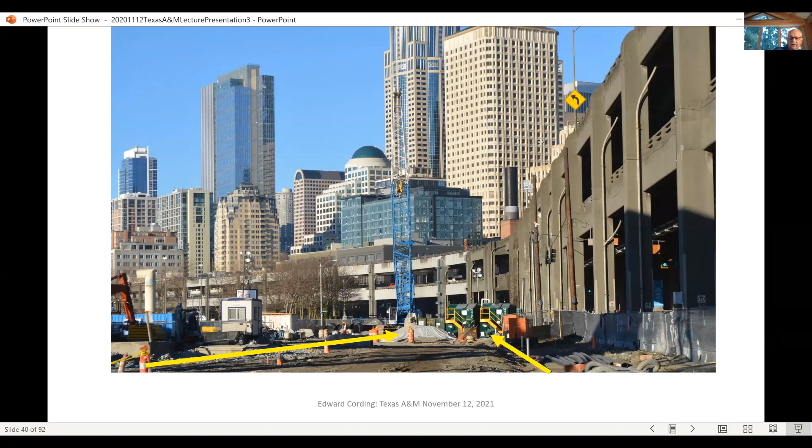After a 2-year delay to replace the main bearing, the news was pretty much negative, but this was really the first positive news - there were no adverse effects, no settlements. There was some heave because we pressurized in some cases almost up to the overburden pressure, but it's really like a pressure plate advancing through the ground, and by controlling that we can control settlement.

We went on into Pioneer Square, and at the building that is circled, we were monitoring with the piezometers and extensometers.

The contractor provided a report every 2 meters of advance, putting out an email with information on all the settlements that had occurred in the vicinity of the machine, and the pressures on the machine. We're looking at 2 things here.

One is monitoring at the surface on structures, which is more or less to confirm that there are no impacts. You're not in that situation where you're trying to use that to evaluate what's happening in real time with the machine - that's a little too remote for that. So what we're doing is trying to monitor at the source with the extensometers and piezometers.

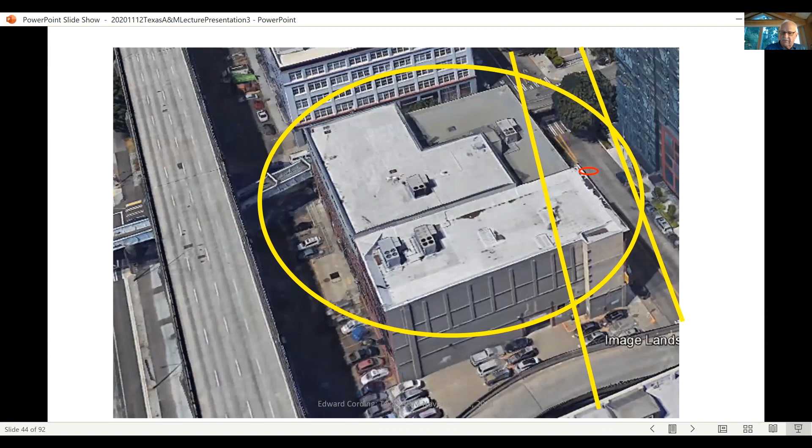In order to find out just what is happening at those locations, daily we'd have a construction monitoring task force, and they would meet in order to evaluate the data. The contractor and the owner's representatives would meet, and having that coordinated effort is a key part of what is required to control and confirm that ground control is being achieved on a project.

Going forward here, as we approached one of the buildings, the 1898 building, the extensometer there showed about 0.8 of a millimeter of settlement, extremely small. Then we got that undrained behavior where you get a little bit of drop off because pressures are dropping some over the shield. Even though you fill the shield gap, you get that drop due to the undrained behavior of the clay and the unloading. The interesting thing was why is that settlement so small?

What we see here is the overburden pressure is 4.8 bars, and the upper face is 3.7 bar - and that's also on the perimeter. So you have a very small differential, and so the elastic displacement is extremely small.

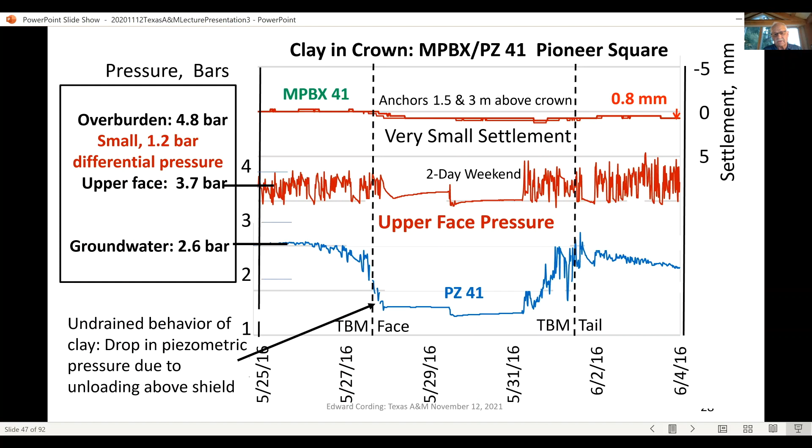We go on up the hill to a depth of about 60 meters, and we're beneath the Pike Place Market, the fish market in Seattle, essentially directly beneath it. The extensometer at that location is getting about 11 millimeters of settlement - extensometer 74. Let's look at it.

Upper face pressure and the shield pressure balance almost perfectly with each other, and that really is what you want to see - you're supporting that top of that shield with that pressure. The face pressure, the piezometric pressure rather, drops a little bit due to the undrained changes in the clay. And what we're seeing here is again, 11 millimeters of settlement, much higher settlements than what we had when we were tunneling at shallower depths.

What is happening is that the upper face shield pressure is still about the same because there's not that much water to balance. We have that water at tide level, it doesn't rise under the hill like it does in many soil profiles. And so the differential between the overburden and the upper face is very large.

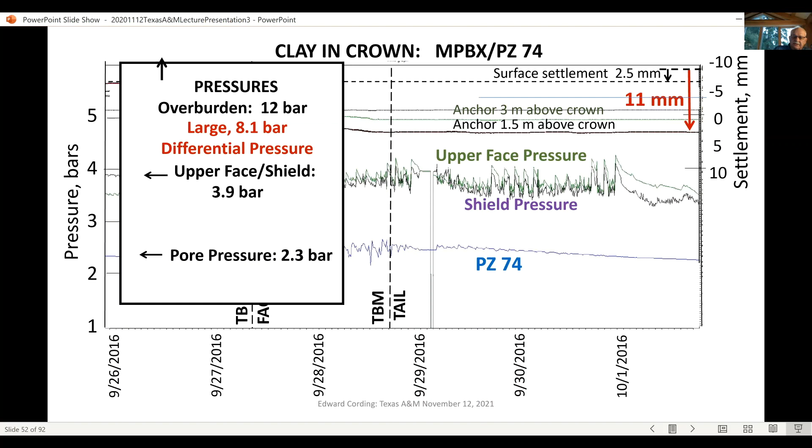But you also want it to be high enough so that it is also supporting the effective weight of material that's between, in this case, your upper face pressure on the shield and the location of the piezometer, which is about 1.5 meters above the shield. So here we have this 0.6 bar difference between the piezometric pressure in the ground and the face pressure and shield pressure that are being applied.

If you just look at that little zone there on the right, you have a differential pressure of 0.6 bars. And then when you calculate that 1.5 meters, the total weight of the water and soil in that interval will result in a pressure differential of about 0.3 bars. So you're in a situation where the shield pressure is sufficient to have an outward gradient that is supporting both the water and the soil weight.

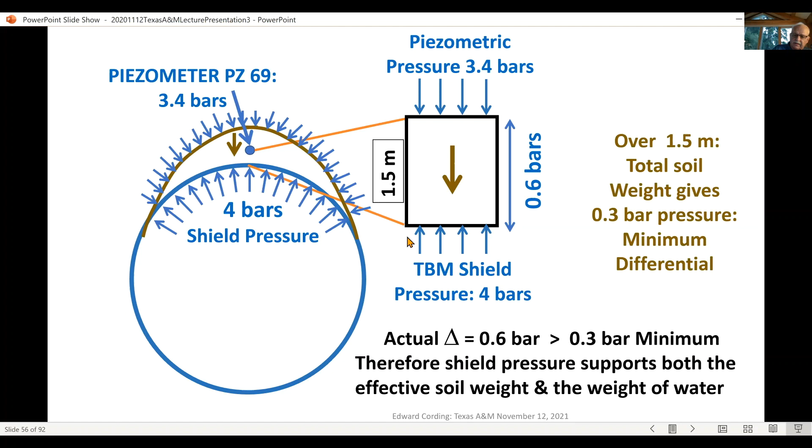And then even as the tunnel boring machine passes further, you get a cake forming, which gives you more of a membrane effect. And so you see the piezometric pressure dropping, even though the shield pressure is being maintained. This is all over the zone from the face of the tunnel boring machine to the tail, and the measurements are made directly above the tunnel boring machine.

I wanted to show you what happened as we approached the BNSF railroad. They were located about 24 meters, or 80-some feet, above our tunnel, and it was the main line of the BNSF. They were obviously very concerned about tunneling and ground control, so we had a series of meetings with them and a number of analyses.

WSDOT took the lead in terms of meeting with them and providing daily summaries, and I was working with the contractor's team. We were preparing reports on the test sections with extensometers as we approached the BNSF tunnel.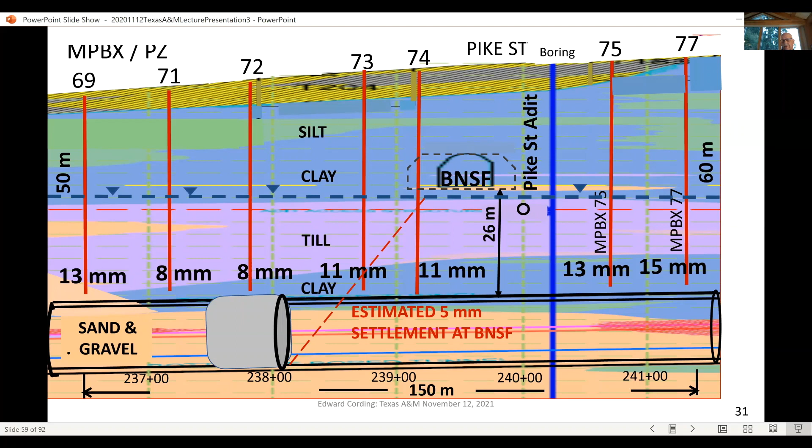So as we approach, the tunnels are at an angle here, as you can see. Our tunnel goes down First Avenue, heading north, and then the BNSF—we'll be closest to it on the right side, and it will pass as the BNSF goes from our right to our left.

What you'll see here is the data we were measuring with automatic total stations within the tunnel, and a series of lines along the existing BNSF tunnel. We put some points on the ties, but mostly on the walls, since those would give the most stable readings.

As we approached, we were about 2 diameters away—in other words, about 110 feet away at this point. You can see a little bit of movement there, a very small amount of displacement.

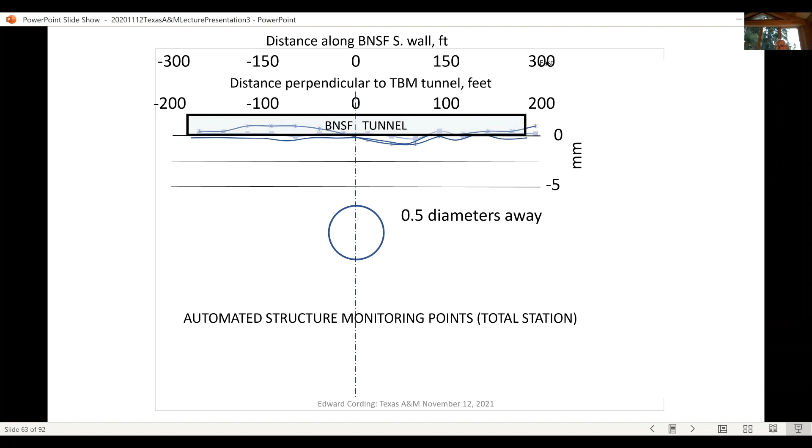The displacement picks up a little bit as we're now half a diameter away from the tunnel, within about 30 feet of passing beneath it. Then the cutter head is under the tunnel, and we're still picking up more movement on the right because of the angle the BNSF crosses above us.

As they got beyond, we started getting a much more symmetrical settlement profile, and the total was 5 millimeters. Essentially, the volumes I calculated for what was happening at the tunnel level were exactly the same at the level of the BNSF tunnels.

What impressed me was that we've seen this sort of data before, but typically we were talking about inches instead of millimeters. So we were really impressed with the excellent precision we achieved with such small settlements.

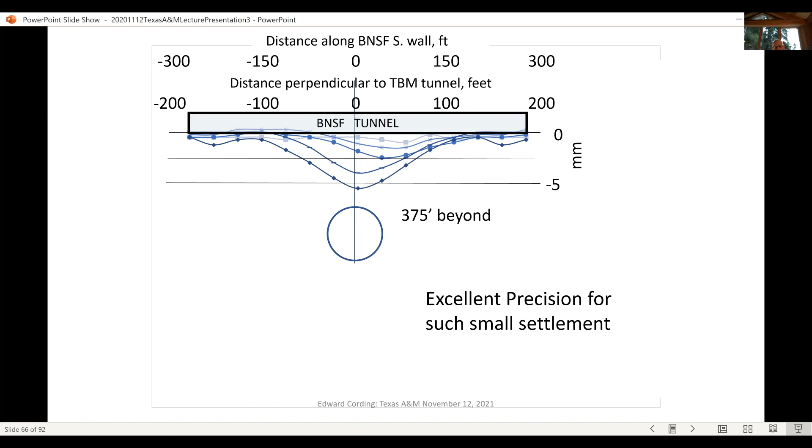As the TBM advanced out to the exit, the question was whether the injection and pressurization we were doing would support the sands as the depth decreased to 10 meters, given some clean sands in the crown.

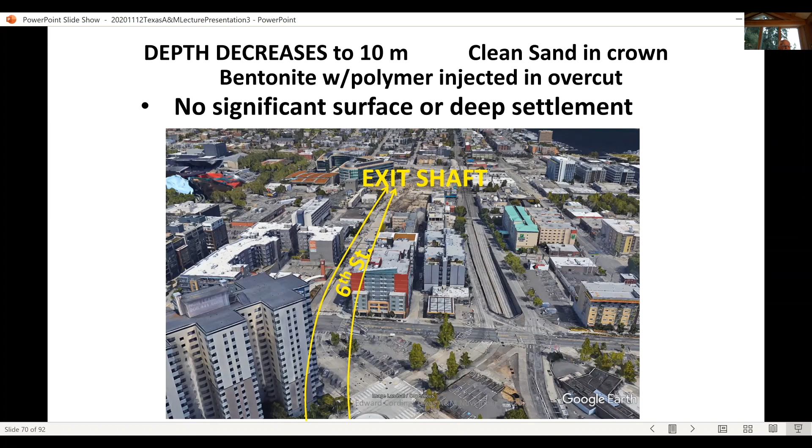In this whole section—you can see 6th Street here where we're tunneling beneath it to the exit shaft—we really didn't pick up any significant surface or deep settlements. We could pick up a little of the deep settlement, but not much surface movement, much like what happened at the other end of the alignment. So the question was, why was the settlement so small?

We started discussing that it's not ground loss we're talking about—it's basically a more or less elastic response between the pressures and the displacements. This was shown by the extensometer settlement just above the tunnel boring machine, which was very interesting.

We had enough data, 150 extensometers, and we got a tremendous profile here. You can see at both ends of the project there's almost no settlement directly above the tunnel boring machine, and then it increases up to as much as 20 millimeters when we were getting at the higher cover because of the higher stresses. Just taking that differential pressure between the surface and the pressures in the tunnel, typically on the order of 4 bars in the tunnel, that was the distribution.

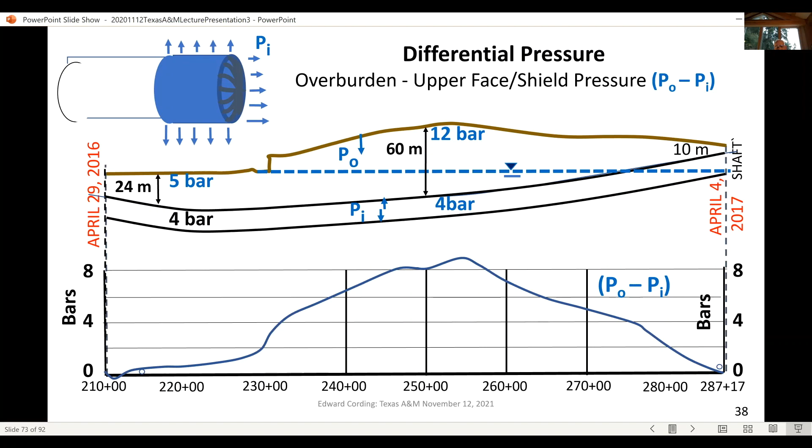Well, when you flip that and compare it to the surface settlement, you can see that they are basically proportional. The relationship there is basically just that elastic relationship. We've taken some of this data and you just put a factor of K on that for some adjustment perhaps, but that E you can determine basically from the in situ data, and you're able to evaluate this for various projects.

When we're in other locations, in soils for example, which are not as stiff, this is kind of the approach that we've used over the years, the empirical data, and that 39-degree angle is what we use to estimate what the volumes would be in the distribution at the surface, and it came out pretty much as we expected.

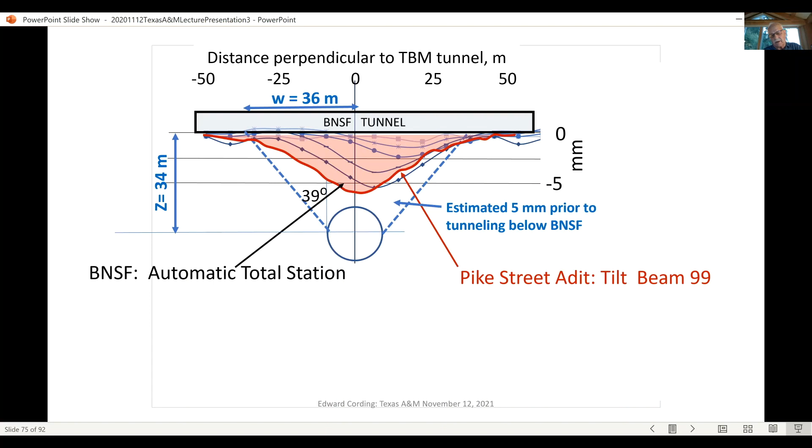You can see what we estimated prior to tunneling below the BNSF and what was actually seen. There was another adit right at that location, giving us almost the same data with basically horizontal inclinometers or tilt beams. So excellent quality data that allowed us to evaluate both the numerical analyses and empirical relationships. What I have here is a relationship using those angles based on empirical data as to how you can estimate settlement and the volume that is occurring due to the settlement, not due to ground loss.

The other thing that we did, and some work that was done at University of Illinois by Professor Hashash and graduate students Liu and others, they analyzed this just using Plaxis 2D and 3D, and they used a hardening model, and they also just looked at it elastically. What was interesting is that they basically baselined the stiffness from the in situ shear wave velocities from borehole suspension tests, and that gave us some very useful results. Because it was really an independent estimate after the fact, it wasn't a curve fitting operation. It was impressive as to how close that data came to what we saw with the actual measurements.

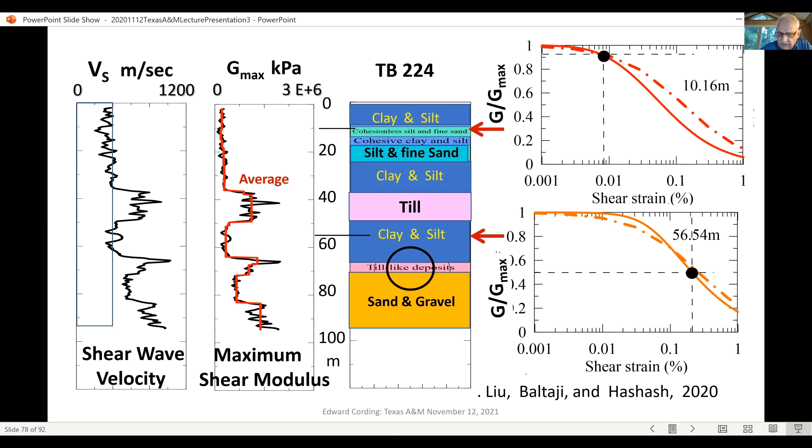The shear wave velocities are obviously valuable for everything we've done with seismic work, but it's extremely valuable here as well for what we're finding of static behavior on underground excavation and tunneling.

This is what the pre-construction FLAC 3D analysis did. But what they did was assume, in many analyses, a certain volume or volume loss, and they just added that in, 0.35%. So with the control that we have, we're able to prevent that sort of volume loss and use the relationships that are more like what we've been describing, the elastic sort of relationship.

We had no ground loss. The shield gap was filled. The face pressures were maintained. It was one of the most consistent operations I've ever seen. Once they got through the problems, they started under downtown Seattle, it was just they had a rhythm, and they really did a continuous support of that face, 24/7 for 11 months and 5 days.

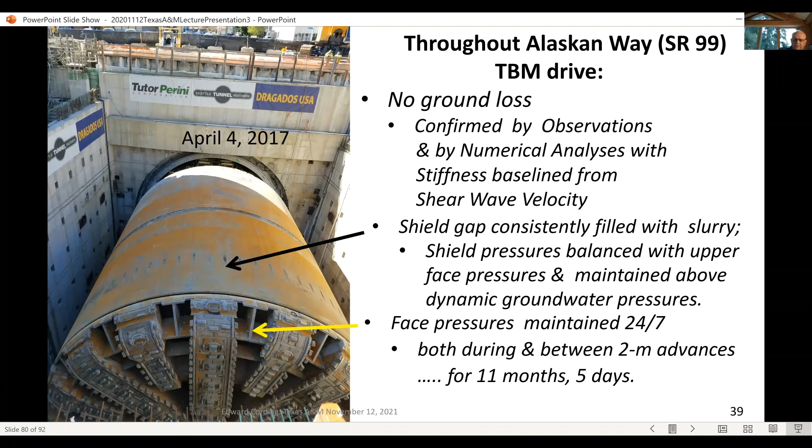These are some of the things that they're monitoring: the ground movements, the pressures, and it's important to measure the pressures in the machine, not just looking at the geotechnical data of the ground. That correlation is just essential, and it's something that we don't do well, I think, on projects where we have groups that are doing instrumentation and somebody else is doing the tunneling. That integration is extremely important.

And that's in the exit shaft. And then we have had some work on the LA Metro. And it's interesting that we're getting the same sort of performance with the 6-meter tunnels where we are requiring the pressurization.

And so we're using horizontal directional drilling more, doing that a lot for magnetometer surveys to locate abandoned oil wells, and also then using it for horizontal inclinometers, putting horizontal inclinometers in. It's really, I think, changing the way we can monitor the ground, and we can extend these under buildings. So we now have that HDD.

And it was, we had the breakout and start of tunneling on the regional connector project about 5 years ago now.

This is really things that we are doing now. We are requiring on Metro filling and pressurization of all the gaps. Settlements are being controlled to values that are a couple of tenths of an inch above the tunnel, and by the time both tunnels go by, they're less than 2/10 of an inch at normal depths. We're going under structures where we have to be controlling settlements to a couple tenths of an inch, even just half a diameter above the tunnel.

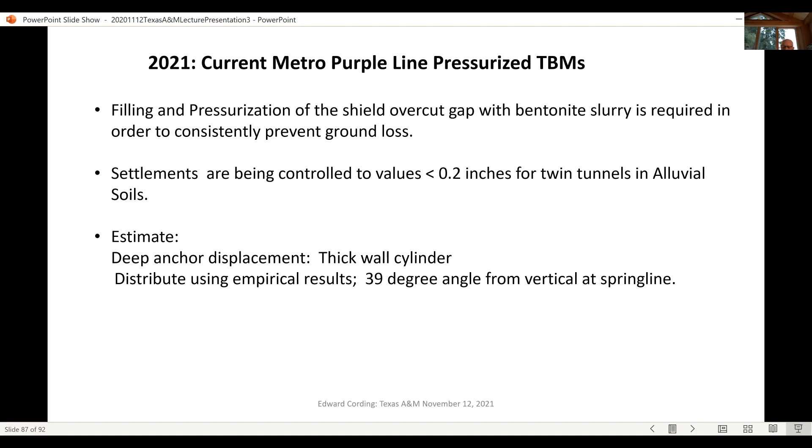We can use the means we've described for estimating. Of course, the numerical methods are extremely useful, and using the right assumptions, the boundaries are basically pressure boundaries, and not displacement gaps.

And then just one item here, I wanted to point out that what we are starting to look at now is the Valley Transportation Authority down in San Jose is going to be driving large diameter tunnels for putting the platforms in the tunnels. Years ago, 10 years ago, we were talking about the fact that they're too deep, we couldn't do that because we had to have a diameter and a half of cover. At least that was the common conclusion. What we're seeing now is with this control, we can be at shallower depths, on the order of even half a diameter, but 3/4 of a diameter to 1 diameter. It puts us at the right level for a transit system, where we're not much deeper.

We can use the escalator. So it's a very major change, I think it's going to be a major change in the future as we use more of these and eliminate the magnitude, eliminate the number of cut and cover structures we have to put in the street with our resulting impacts.

So I think what we're seeing is we are achieving Brunel's objective. It's not that it has been achieved, it is present tense - you have to be doing the right things and controlling things to make it happen. But you can consistently do that in such a way that you can be confident on the project as an owner and dealing with third parties that could be impacted, that you can control that tunnel boring machine and prevent the damaging settlements. So open the ground in such a manner that no more earth shall be displaced than is to be contained within the hollow body of the tunnel.

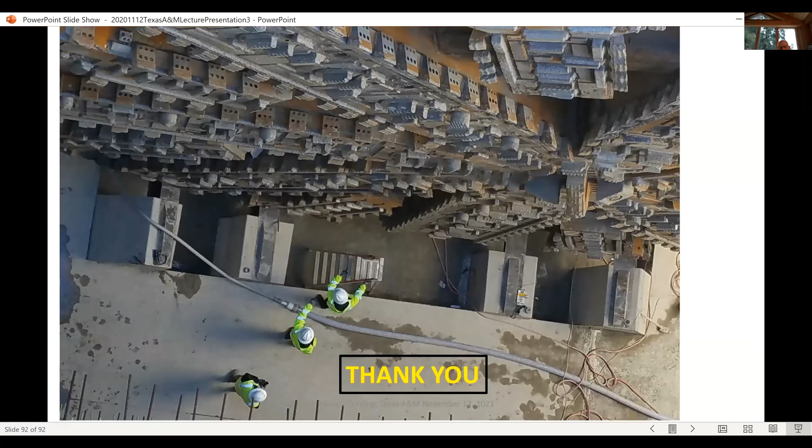And those two little green dots there are people. I think they're thanking the TBM, but I thank you all. I've enjoyed even remotely participating in this conference.